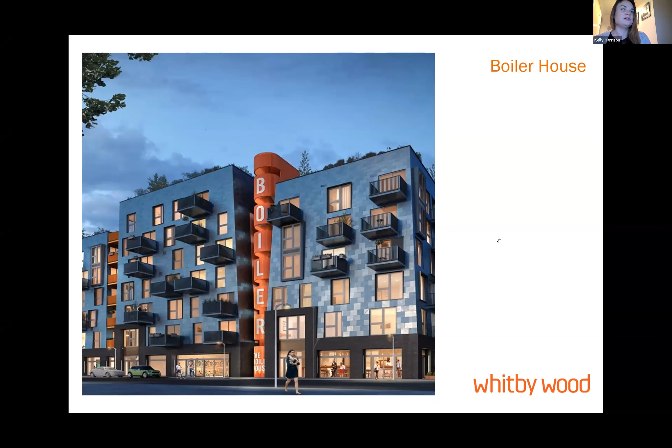I'll show you now a couple of projects where we've looked into a few of these studies. So this is the boiler house. It's been built now for a few years, but it's a project where the design at the start was for a concrete framed residential built multi-story residential building, and what we had a look at was changing that concrete to a CLT frame.

The concrete frame was originally on a series of piles in the ground as well, on piled foundations. This was a few years ago now when we were allowed to put timber in the facade of the building, so we'd have a slightly different model now with different exterior walls, but you can see it was a very lightweight construction, and I just wanted to show you a quick study we did.

So comparing to the original design, which had all of these piles under the concrete structure, we managed to make it light enough to allow it all to sit on a podium, which then sat on a raft slab. The original design had 967 meters cubed of concrete, and we managed to reduce that on a 600 millimeter raft slab to only 485 meters cubed.

I'm not going to quote costs here. I think that's probably for the QSs this evening, but this is the type of information we would give to the QS. So in addition to saving all that concrete, which has a huge carbon benefit as well, it also avoided a lot of risk in the contractor's price. So that's another thing to think about.

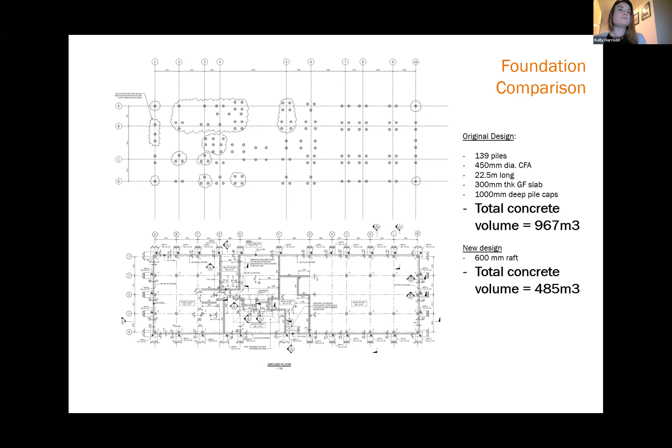That's been my experience. This is something else we did in the very early stages of a project, where we were looking at lots of different options. So not only were we comparing the carbon benefit of various construction techniques, but also the costs. We had a friendly QS help us - this was actually a project in Europe, so it's all in euros. We were able to look at what we thought the costs were for the structure, and also the CO2, and that could make a really strong argument to the client.

I think another thing you could add to this is the value, because sometimes it could also be a much more valuable asset to have a sustainable construction technique, especially with changing policies and targets that we all have to hit.

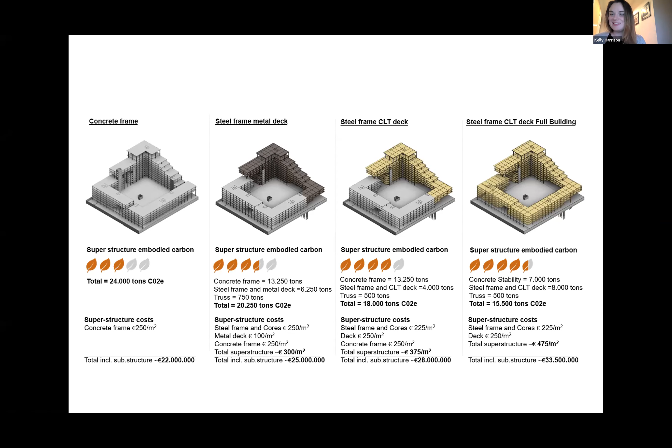Here I've just given you a few examples. This is what you should be thinking about when asking your structural engineers for options.

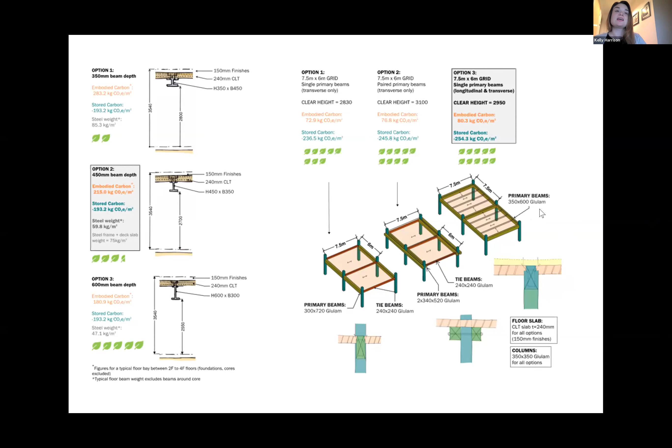That steel tonnage was then given to the QS to work out the price for the steel for the floor. We also looked at different options for timber floors, and again looked at the carbon of that. I think you should really be looking to your structural engineers to think about these different options and ways of doing things to get the price and the carbon down, because it often goes hand in hand.

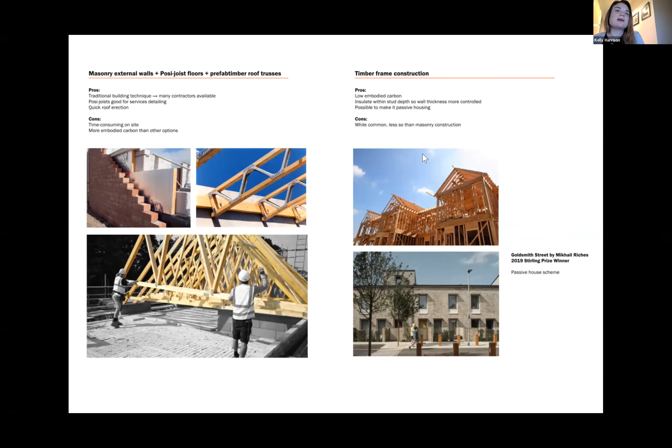Another one is timber frame construction. It's a bit less common than masonry, but also done quite a lot. It's really easy to insulate, and if we're thinking about passive house type construction, then it's something we should be considering. Low embodied carbon as well.

There are then other products on the market too, SIPs - structural insulated panels - where we have OSB either side with insulation. These are load bearing, so they can be our structure as well, but they're only done by certain manufacturers, so your pool of people who can build this type of thing is a lot smaller, reducing competition. It's really lightweight though, and can sit on very light foundations.

And then we have CLT, cross-laminated timber, which may produce a beautiful interior. It may also be very quick to erect, but it's quite thick - rather than having the insulation within the wall, as with timber studs, it will be in addition to the wall, so you get quite thick walls. It may be that on mass it's a very economical way of doing it, but for a singular house or one-off, it may be quite expensive.

So these are the sort of pros and cons and things that we think about as structural engineers and bring up to talk to our team - the architects and the QS - to come up with the best solution. So that's just a really quick intro from me, and I think we'll then go on to our speakers, if that's okay.

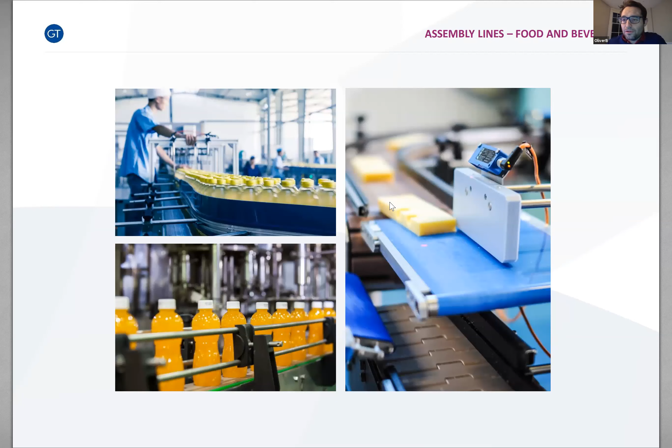In terms of food and beverages and certainly the automobile industry, and even caravans really, which is a step towards housing, these industries have been there for a hell of a long time. And yet, as Kelly touched on a little bit earlier, we're still physically using our hands brick by brick to build our houses, which is slow and perhaps ad hoc, and could be done in a better way.

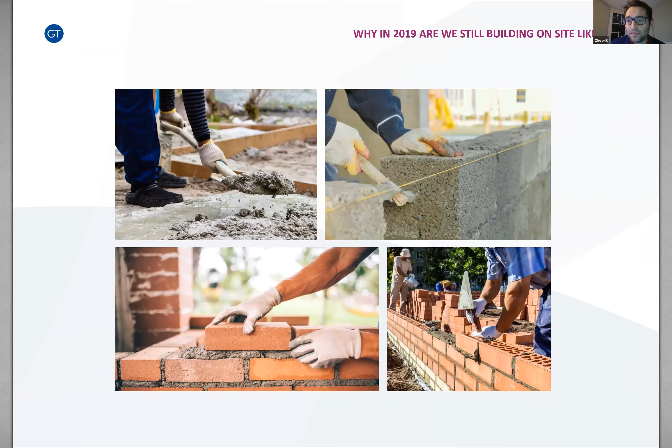So this slide is just to try and illustrate the idea that there's 30 to 50 subcontract packages in a typical residential project. But by adopting MMC, we can potentially take out some of those subcontract packages and actually use it in a way that we adopt it by going offsite.

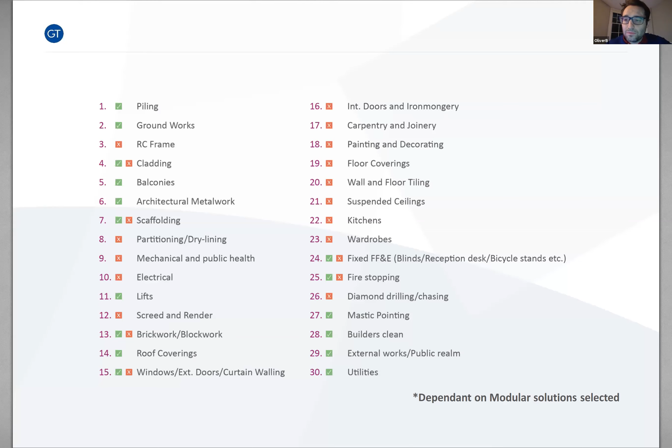And so that really means that we have to have a different approach to estimating. Ourselves and CAST, who are on the call as well, we've had to kind of rethink how we cost our buildings, and it's not been easy, and some are better at it than others in terms of organisations that have embraced it, and some haven't.

So I thought I'd start with a little bit of Latin. I don't know if there's any Latin scholars on the call, but basically the motto of the RICS is est modus in rebus, there is measure in all things, which I think is quite a positive way of looking at things. The way I read that is that there's nothing we shouldn't be able to cost really, and I think that's the approach we should take.

And a big part of that is collaboration. So as QSs, we're very used to costing reinforced concrete frames, which is essentially mass concrete, rebar. We get told the weights by Kelly and her guys and essentially price it on that basis, and then formwork. That's been around for a long time. We've got lots of benchmark data. It's very, very easy for us.

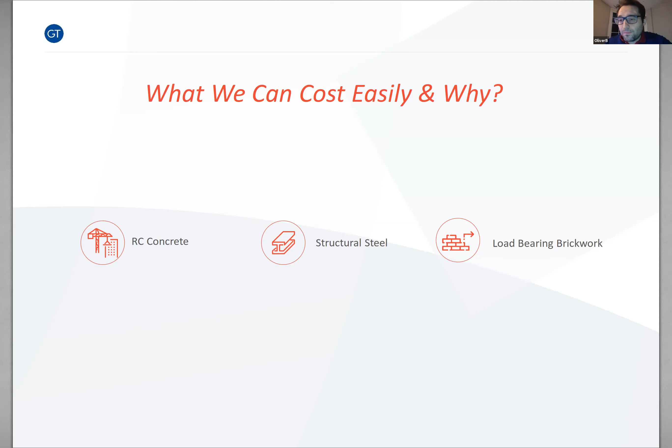Structural steel tends to be measured on a tonnage basis. Again, Kelly will tell us what kind of beams we should be using, and we will apply a rate for that. And load-bearing brickwork - again, it's been around for a hell of a long time, and we're very accustomed to costing it and have lots of benchmark data.

But we're in a relatively brave new world. I say that because obviously some of this stuff's been around a hell of a long time. And as Kelly's touched on, SIPs, structural insulated panels, the likes of Barratt Homes have been using this for many, many years. It's fast, it's lightweight, it's sustainable timber construction, glulam beams and columns. There's different species of wood.

Typically we might be talking about pine or spruce because they're perhaps the cheaper of the timber materials, but it may be that we could look at other materials as well, in terms of larch or beech and things like that. That's another question for you guys to get you thinking.

Cross-laminated timber, some of the examples Kelly showed earlier, laminated veneer lumber, and then hybrid. Don't just force a square into a circle or vice versa. Sometimes it's about working with materials to best fit the actual solution, the design and the site. This different approach means we have to look at different things in a different way.

We have to look at engaging with the supply chain earlier, which, because we live in quite a confrontational industry still, doesn't happen early enough. We need to look at different procurement strategies. We need to understand that if this stuff is coming off-site to on-site, what are the transport restrictions? As Kelly touched on earlier, lighter structure should mean lighter foundations. We need to work hand in glove with the engineers to try and do a comparison.

We need to look at economic design principles, because off-site construction has different design principles, which again are often driven by the fact that this is brought on the back of a truck to our sites, and there are restrictions in that. Benchmark data that's available is growing - CAST are doing loads of work on this, we're doing lots of work as well. And look at program savings, because it should be faster as well.

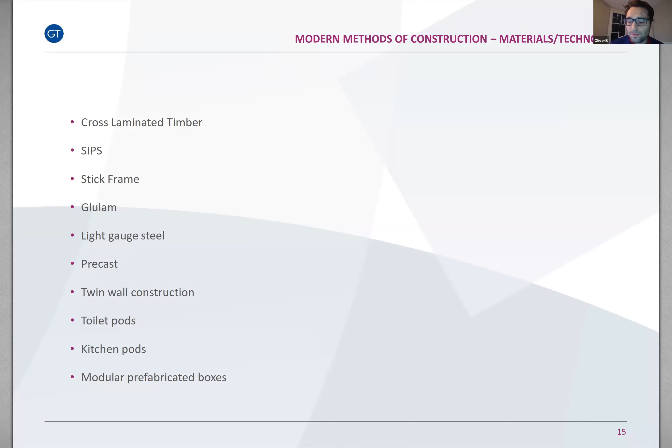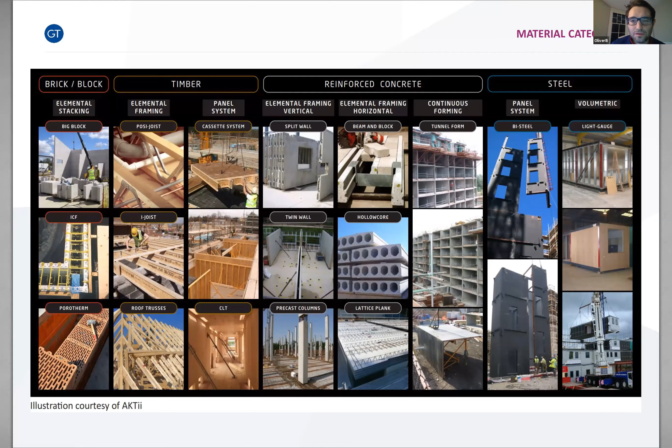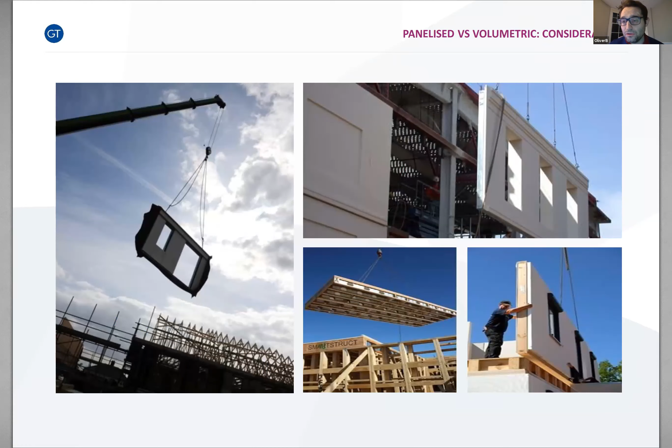Here's just some examples of that, and a really good slide by AKTii which shows all the different types and how they might all fit in - so I would pinch this because I think it categorizes it quite well. Also think about, in terms of what you're doing, is a panelized solution, essentially 2D construction, better for what you're trying to do, or are you going to adopt something that's perhaps more three-dimensional?

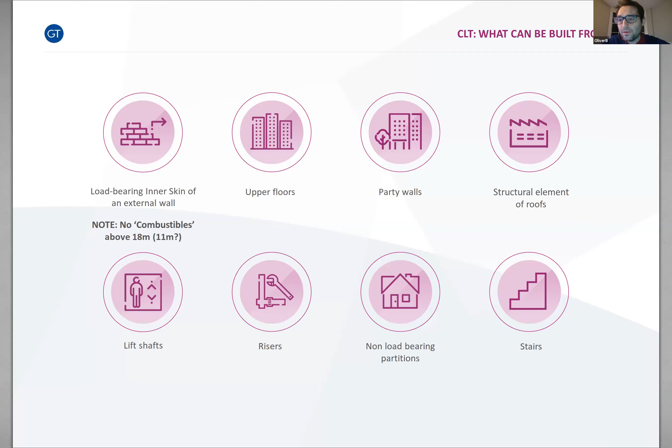Kelly touched on this earlier - be very careful about putting any timber in, because it is unfortunately categorized as combustible in your buildings, albeit at the moment that's only for buildings over 18 meters. It's probably going to 11 meters. So the heights you've been given, you could probably do it, but there's a danger you might expose your client to future changes in building regulations.

Just thinking about space layouts and good house building principles that sometimes get lost - stacking, spans, what makes your building more efficient. Let's look back to the automobile industry in terms of repetition and standardizing things, because savings will fall out of that.

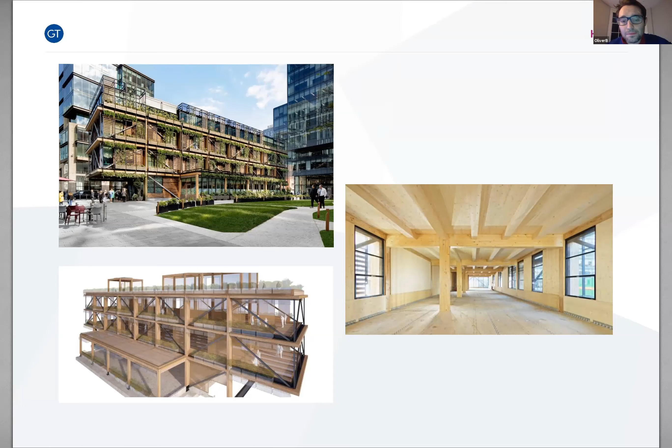Now some more extravagant examples. These aren't houses, but again, the use of glulams, CLTs, rib slabs - there's really a plethora of different technologies available today, so go out there and do your homework. This one's an expensive house, so I'm not expecting to see many of these, but precast concrete cores, LVL and CLT.

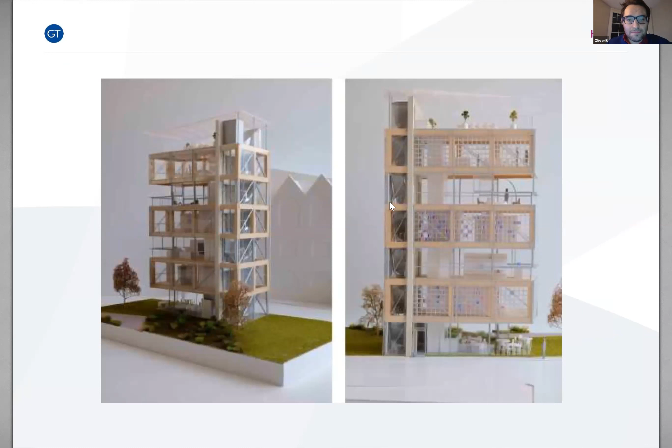In terms of supply chain and procurement, it'd be great to see your submissions thinking about how you're going to deliver it. Are you going to use a traditional main contractor on a D&B basis, or are you thinking more a construction management route - going into direct contract packages with subcontractors, suppliers, etc.? It'd be really good to see your thoughts on this.

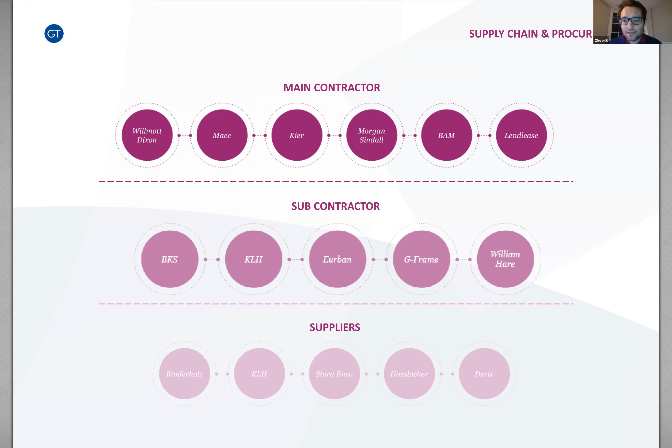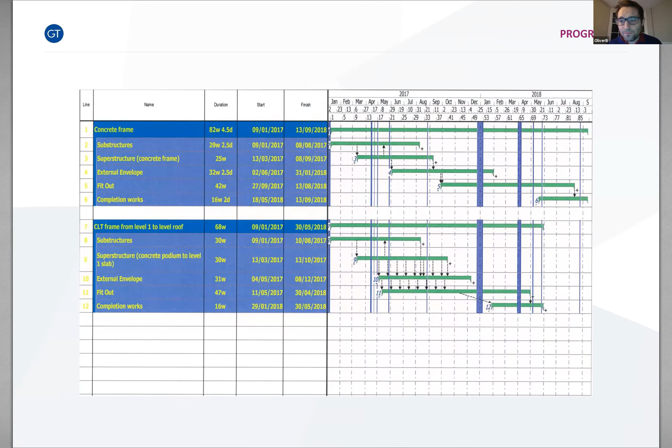These are all examples of people in the timber industry. Be great to get you thinking about program. As Kelly touched on as well, often as a QS we haven't got the program available, we haven't got the comparison. How are your houses, if they're more offsite, going to be built quicker? How are you going to deliver so the client's return on investment will be better? They might want to put some narrative to that and have a think.

Speed of install, program benefits, lighter structure, prefabrication, things like lack of patressing - this might be a narrative in terms of how you're going to do your submissions, but we really want to see you thinking it is sustainable.

We need to be thinking about embodied carbon. We need to also be thinking about life cycle costing in what you're doing and what you're choosing. Personally I've got a bit of a bugbear, as I know many have, that sequestered carbon doesn't seem to be recognised enough at the moment, but maybe you might want to write something on that.

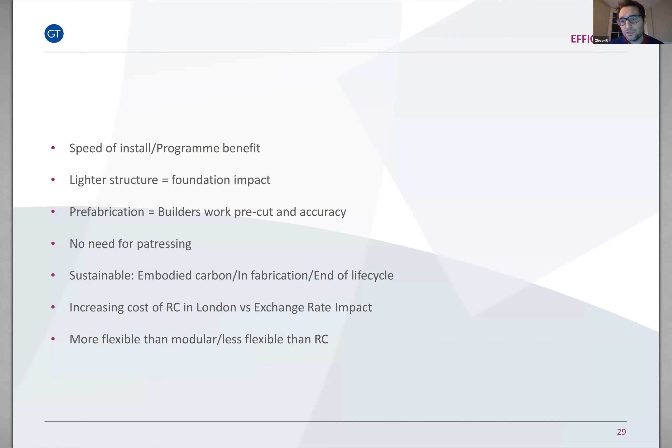I've touched on London there. I appreciate we're not working in London, but have a think about location as well and how what you're choosing will fit into that location in terms of cost, and what's most flexible as well.

Again, just themes - cost, procurement. Can the UK manufacture again? Quality homes - perhaps quality homes cost more initially, but there's lower life cycle costs, better quality of living for the people living in them. Job creation, in terms of using stuff that's built in factories that could run 24/7, that all sorts of people can use and be trained in. Good architecture, think about transportation and potentially capacity in the industry as well.

Going back to that original slide at the beginning - how do we fix affordability and availability? How do we meet critical demand? Well, offsite manufacture is a way, and timber has a massive role to play in that.

Time is money - this stuff should be installed and put together faster. Reduced risks because you're faster to site. You can manage the process in a factory environment which is quality controlled. It's potentially safer because it's done in that controlled atmosphere. Kickstart the UK economy post a Brexit era.

Technology advancement, BIM - again, it might be just a bit of narrative in your submission, but that might be something you want to touch on. Sustainable homes, getting to net zero. Let's face it, as a natural material, I don't think there's anything better out there than using timber products, so that should be a big part of it. Wellness for the end users as well.

I just thought I'd end finally on things that we might be thinking of as a collective of judges for the task you've got at hand. So what drives your procurement and tendering route? Think about - is it cost certainty to the client? Is it cost competition - do they want to compete, put lots of people against each other? Or would they prefer to negotiate and just get it right with somebody?

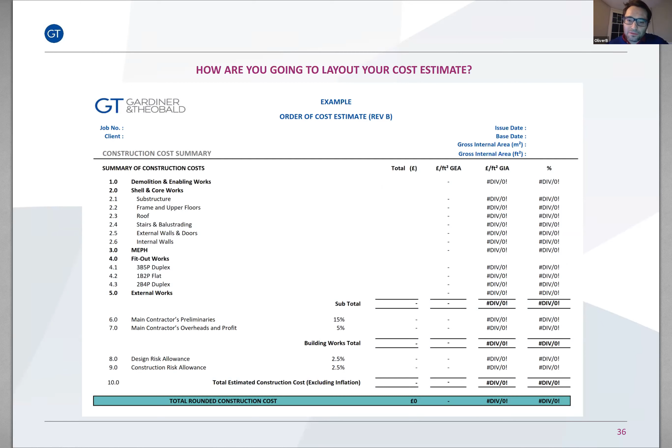Also just think about how you're going to lay out your cost plan. I'm sure the guys are going to talk about that more later on. But how are you going to put it all in a sheet and some backing sheets for your client to go through and understand what you've allowed for, and just some useful tips and references.

NRM, SPONS for costing if you can get hold of it, BCIS if you have access to the RICS facility. Market testing, ring people up and see if they'll give you a quote for stuff. I found people in the industry to be very giving with their time and advice. And don't forget your scale ruler, really.

And that was it for me. So thanks for listening.

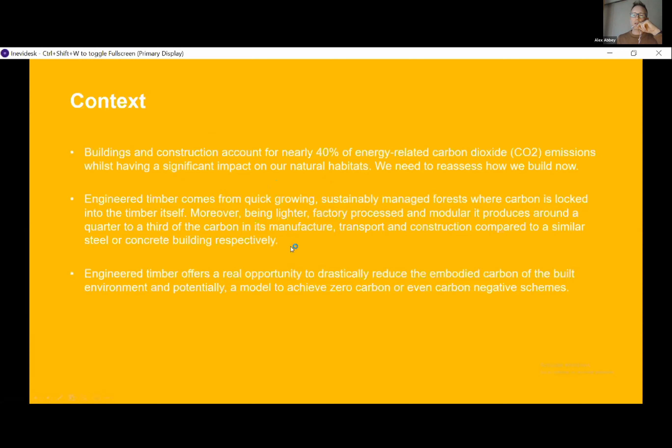So the first element is the context to say that buildings and construction account for nearly 40% of energy-related carbon dioxide emissions. But timber, hopefully, will be the solution to get us to net zero. And this is in the context of, as architects, we've signed up to Architects Declare. And the RIBA also has a 2030 climate challenge, which is about energy targets primarily, but also embodied carbon, and that's where timber particularly comes in.

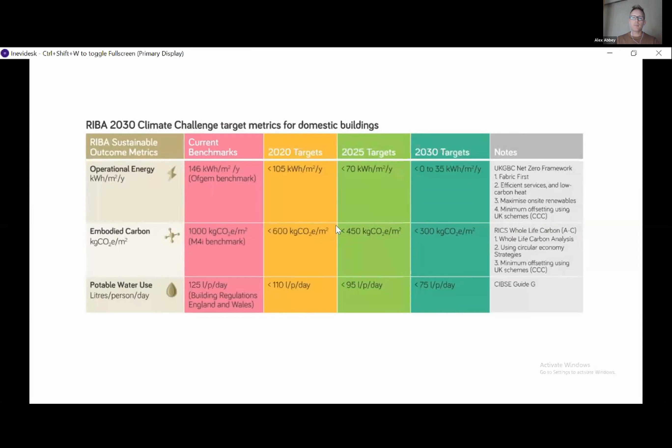And the LETI guide, which is the London Energy Transformation Initiative, has produced excellent guidance on how we can get to net zero. And I recommend you look at their documents. They're available online at LETI. And they've done a supplementary primer on embodied carbon there.

At the moment, TRADA and LETI are beginning a conversation about how we can get to an agreed benchmark for measuring carbon in timber, because the other industries, concrete and steel, are all fighting back and making it look like they're just as good as timber, but we don't believe it is.

So I am a partner at Cullinan Studio, an architect's practice based in London. And I also sit on the board of the advisory committee for TRADA. We are committed to re-establishing the natural world in our built environment, whether it's how we connect to nature, how we build for a circular economy, or produce healthy buildings for communities. And every project we work on now is seen within that context.

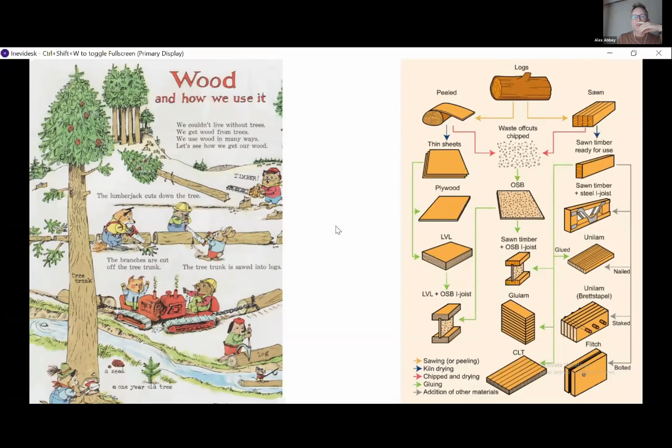Just up the road in Newcastle is what purports to be the largest timber structure in Europe, the Dunstan Staithes. This was also on your site, and it was used for dropping coal into the boats, with smaller ones there too. But I think the judges will inevitably be looking for something which picks up the industrial past of Sunderland.

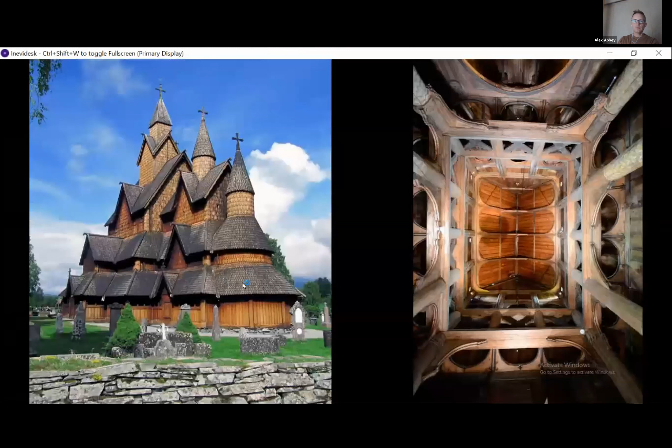There's excellent examples of timber structures there from history. The history of timber building is long - timber, if properly detailed, can last upwards of 1,000 years. These are the stave churches in Scandinavia, Norway, load-bearing timber, very simple but beautiful.

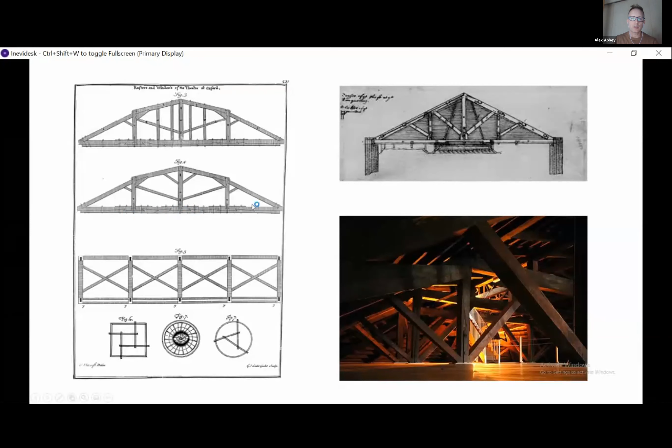People like Wren and Inigo Jones took cues from the Renaissance architects and developed improved ways of spanning greater distances. For instance, the bottom right is the Sheldonian Theatre in Oxford, looking at how you can take simple pieces of timber and scarf them together to get better spans and improve the structure.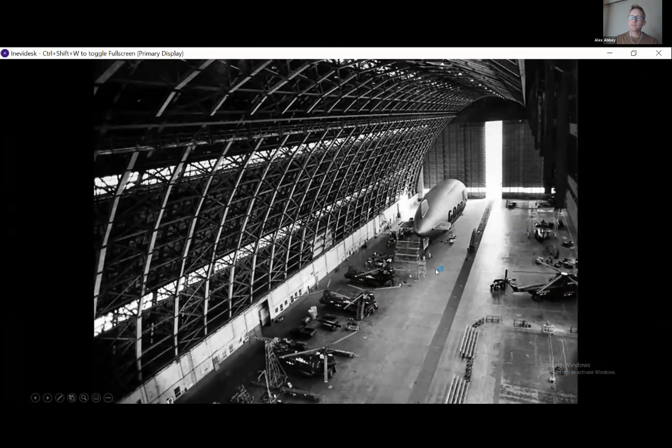Then you get to the big spans like these airship hangars here. I'm going to try to also give you examples of projects we've worked on in our practice, which are good lessons or examples of similar systems.

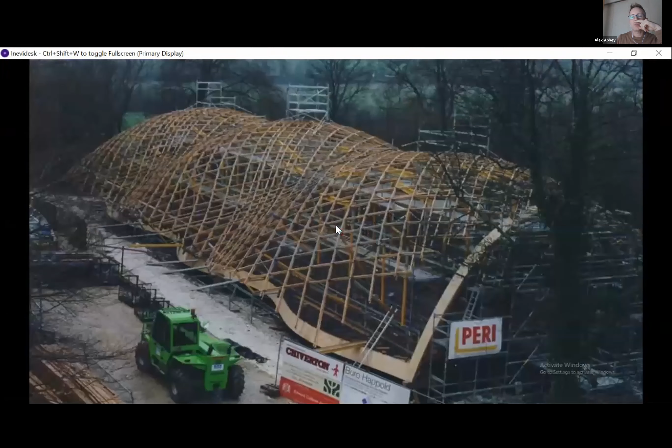This is the grid shell we built at the Weald and Downland Museum, using very small pieces of oak, finger-jointed together like spaghetti, over 50 feet long, then basket-weaved together, and we dropped the scaffold to create the building. I'm not saying this is what you should do for your house, but it shows you the possibilities of timber.

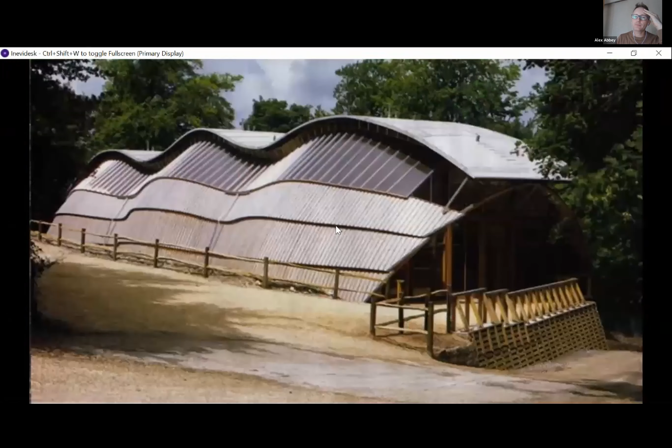And a very successful free-span space with minimal use of timber.

Cost and value - I won't dwell on this too much because Ollie has already talked about this, and Danny and Rob will come on to it later - but this was in the book, a study comparing concrete and CLT. Even though the costs at the end were broadly similar, you get a much faster build, which has savings against that which aren't shown in this figure.

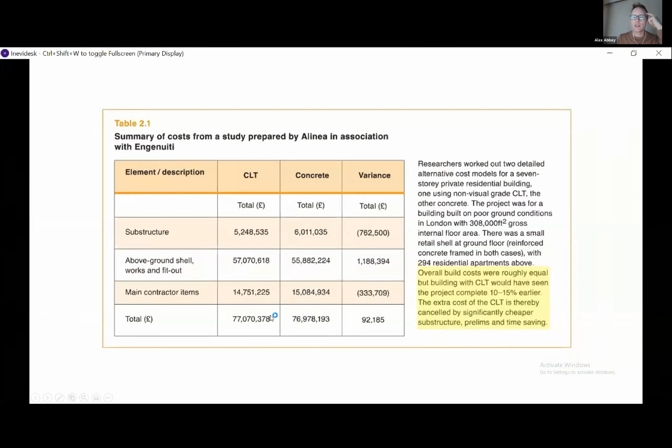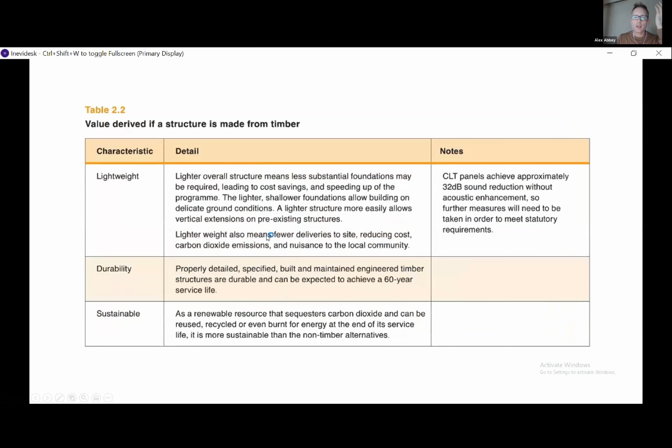The benefits of timber, I think we've all seen: it's lightweight, durable, if properly detailed, sustainable. The value derived from it is that you get accuracy. It can be load bearing. It's very easy to fix to, rather than plasterboard, which can be a nightmare with patching. It can allow minimal thicknesses against other structural systems, which over several stories can get you more floors for the same height of building.

Energy saving, self-finishing if you expose it - obviously visual grade timber is more expensive, but it has other benefits I'll come on to. And off-site manufacture, one of the big issues, absolutely leads to much safer sites, which is often overlooked, in that if you're producing things in factory conditions, they are safe, they're in the dry, well lit, with systems set up for production lines, so it dramatically reduces the potential for injuries on site.

There are issues as well. One of the cons at the moment is fire, insurance and water, but they can be overcome, and TRADA is working hard on this with the Structural Timber Association and the industry to come up with a suitable response to the sort of knee-jerk reaction of 'we can't have timber in buildings because it burns,' which is unfortunate.

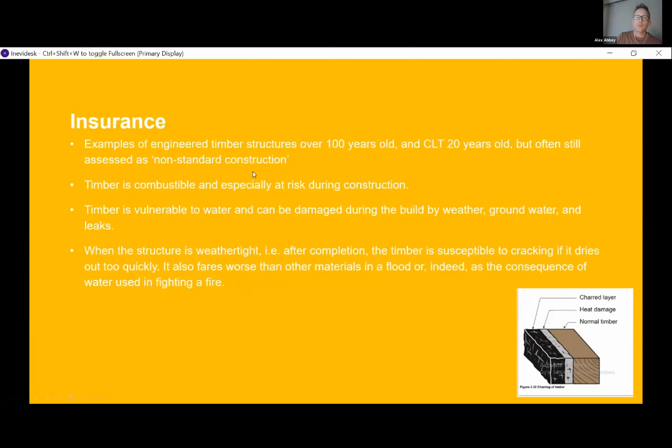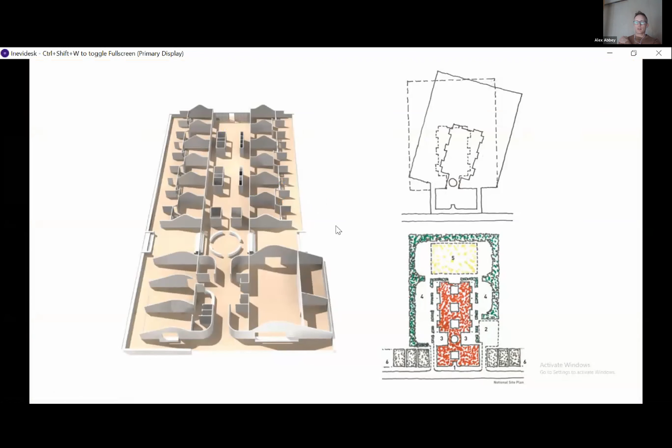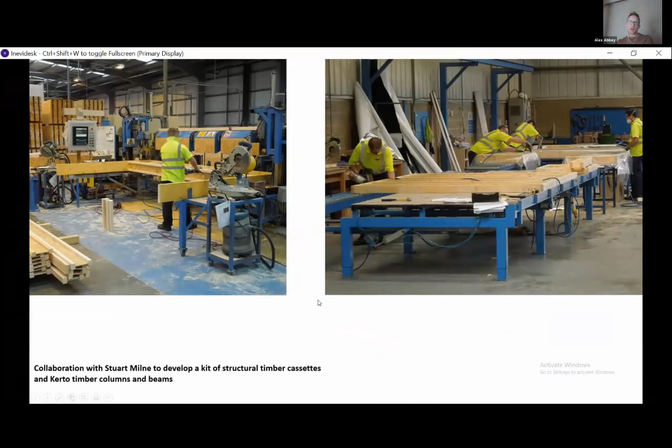Here's an example of one of our projects, a SIPS panel school designed as a kit to go anywhere in the country, but ideally to fit into a street facade. It was a repeating module of classrooms and toilets. We worked with a SIPS manufacturer, Stuart Milne, to develop this prior to having any site, and we tested it on a site in Swindon. It went up in less than 5 weeks, and the whole building was watertight in 7 - a huge improvement over traditional methods.

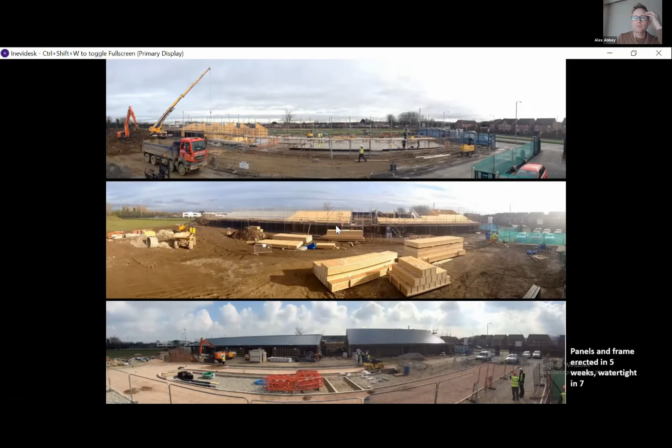Although that was mainly SIPS, this is the recent Stirling Prize winner in Norwich by Mikhail Riches, which, although brick, is a timber frame project - a passive house, and an example of how you can produce really the highest quality housing in timber.

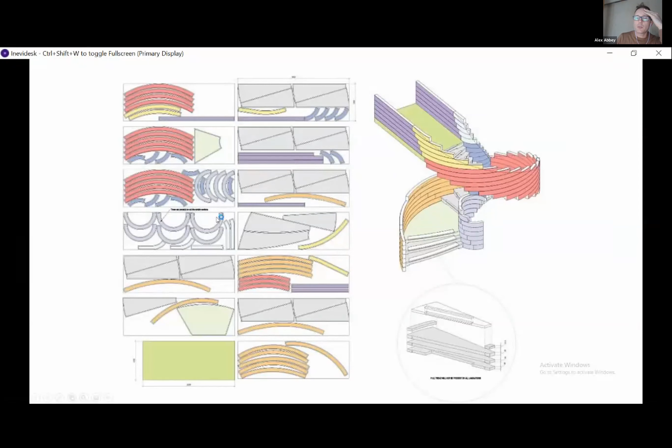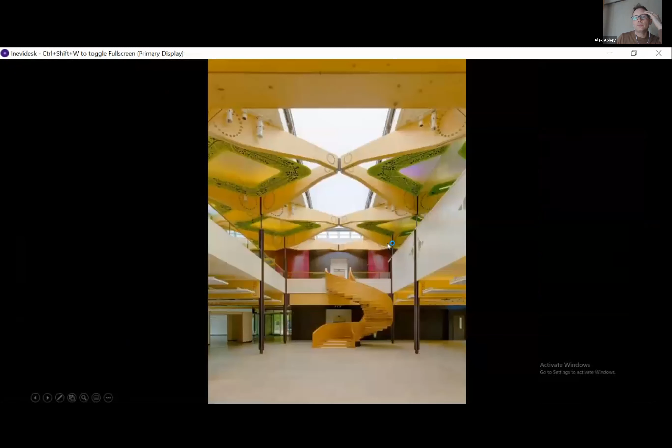Here's a building which shows that if you understand the material, you can make it work for you. This is what we did at the Botanic Gardens in Edinburgh, where we understood how to use the LVL, designing a staircase which could be cut from standard sheets, again modular, to produce a feature stair out of LVL which was stacked and carved.

So structural timber used as a piece of furniture in a sense. This is a hybrid building as well, with very thin steel columns to get that sense of lightness, and then heavyweight timber beams floating over the top.

There's increasing knowledge within the industry of how to use timber, although what we found is it's more prevalent among certain contractors - they like to use it once they have, but some are afraid to, and you have to convince them.

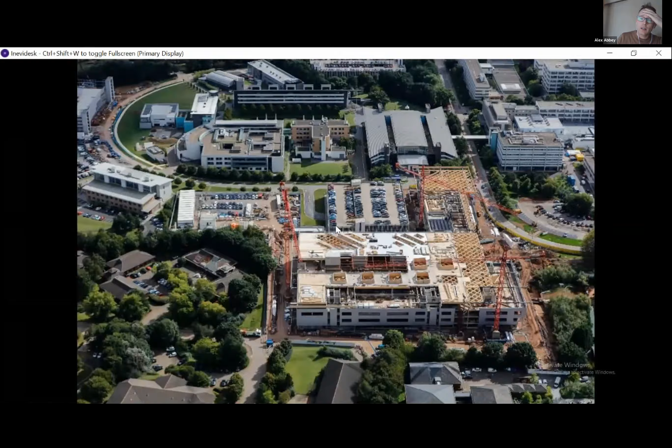This is a building we did at the University of Warwick, the largest timber roof in Europe at the time. That was working with Arup, for Jaguar Land Rover, who are car manufacturers, but they wanted this unifying timber roof for the benefit of the users in the building and the quality that gave them.

Supply - you need to think about supply. You're right on the docks at Sunderland, so could you create a nice set of drawings about how you could bring things on ships and get them to site? A lot of engineered timber tends to come from Europe - CLT particularly, and LVL. Or could you helicopter it in?

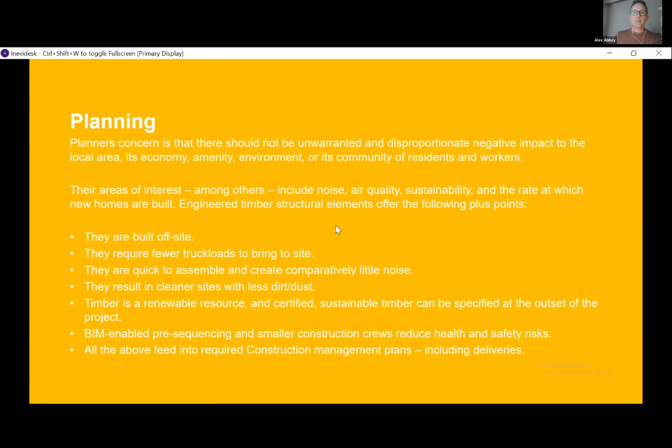Durability you have to think about, which I touched on at the beginning with those 1,000-year-old churches. This is a walkway we've been doing - it has to sit in a forest, and once it's up, it's up, so getting in there to maintain it is much harder, meaning it has to be very durable. You have these little timber pods for learning areas, made of Accoya, which is a chemically treated timber so it can last outside.

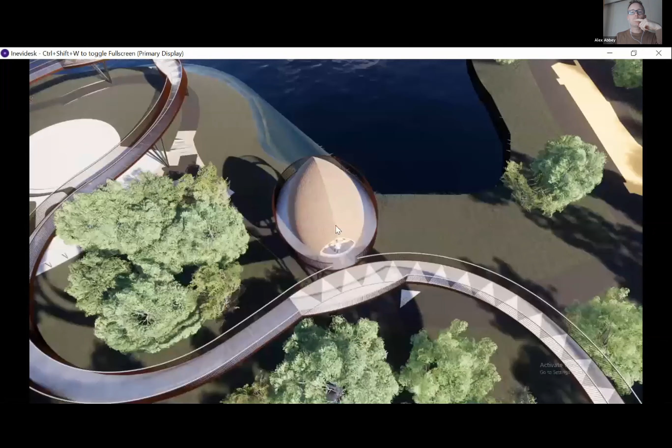So you have to think about what you're going to clad your buildings in. If you do use timber, there are other methods like charring it or coating it to consider. That's one of the learning pods.

So yes, think about how the home is - where you get light in, how can you make it feel like a home.

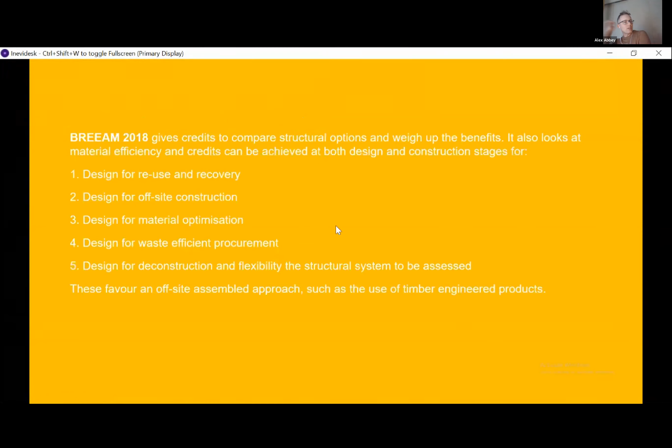We need to think about doing that. We need to be doing that now for hitting net zero.

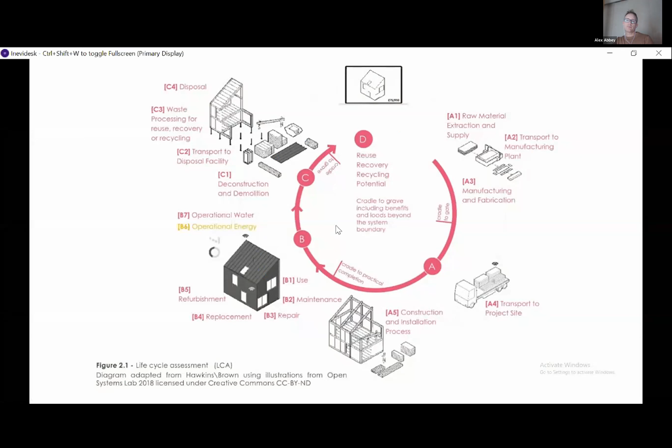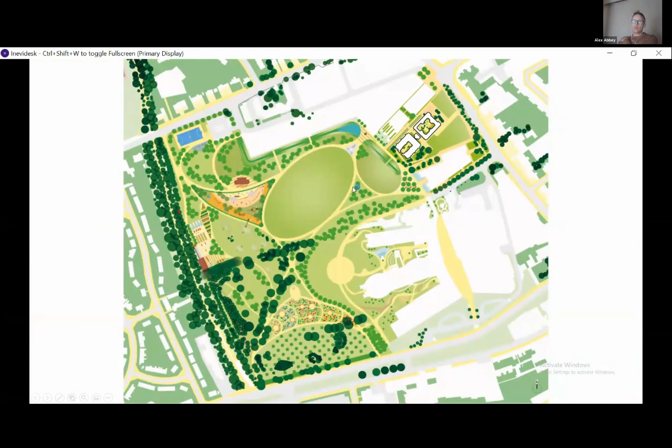That's why we've been working on this project, a park and health buildings for the NHS in Liverpool, Alder Hey Children's Hospital. We selected timber for it to encourage homeliness for the children with mental health issues who are using these buildings, and to give them, even though it's an NHS building, a feeling of less of an institution, and encourage health outcomes and quicker recovery times, all around a garden with views and light, and places to sit.

So that's me. Thank you.

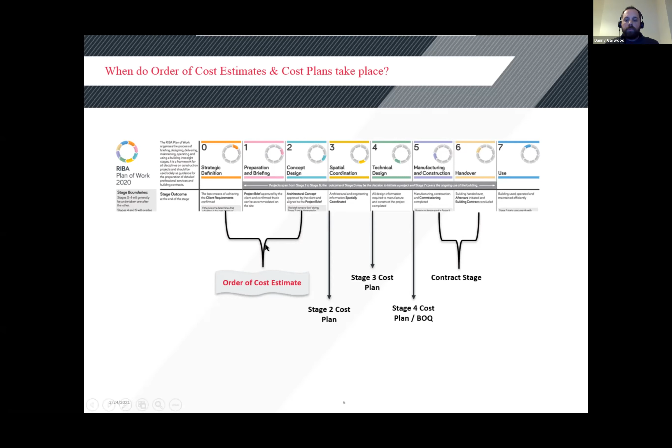So this is where it gets really exciting.

The RICS guidance of NRM 1, 2 and 3 really gives the industry a consistent approach to how we structure cost plans and cost estimates, and sets out rules for how we should approach each individual element. NRM 1 talks about the structure and the rules, and NRM 2 goes into the finer detail of how you would measure a timber building, for instance, to the nth degree, and that typically doesn't take place until the later design stages. I must admit, NRM 3 I've never opened in my life, and that's more looking at how we cost and estimate maintenance work, so hopefully none of you will ever have to do that, because I imagine it's not very exciting.

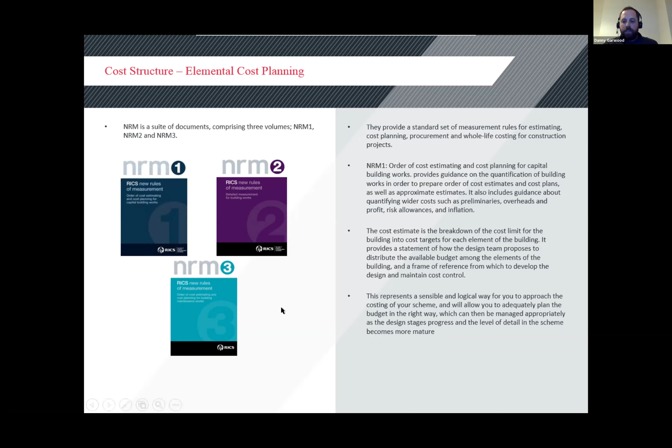Okay, so what we're showing here is the typical structure of a cost plan, and I think Ollie showed it in his slide earlier. I think this is probably quite an important slide to review and understand.

This is the breakdown we'd typically see a cost estimate broken down into: you have your group elements, which are 1 to 8, the building works, and this is any cost associated with the direct cost of putting the building up. Then we've got groups 9 to 14, which we call the indirect or on-costs, which are typically your main contractor's preliminaries - the management required to build your house or any project, alongside all the plant things like tower cranes, scaffolding, your site setup and welfare, all those things that sit in your preliminaries.

And then the 10 to 14 are the costs of the overheads and profits - obviously we need to be paid at some point - so you have your project and design fees, architects fees, other development and project costs. Then typically you'd have a risk allowance and also an inflation allowance. Some projects we work on can go on for 3 years, or we could speak to a client 2 years ago and still not have got it through planning. So we do have to take inflation into consideration, because depending on the size of the project, it can be a long time before that initial first cost estimate until you're actually putting that first spade in the ground.

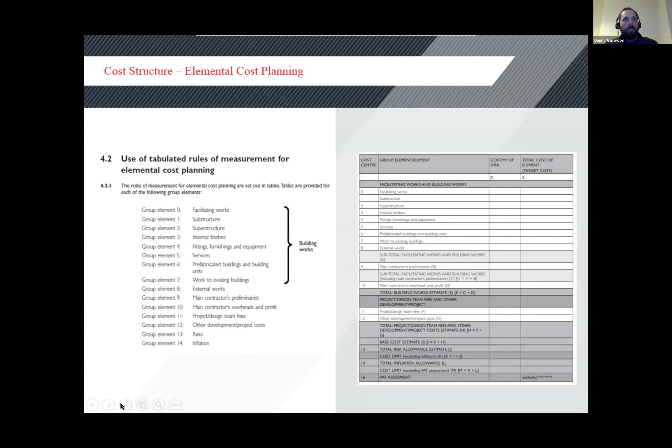Your group element is your 9 or your 14 groups here, and within those group elements you'll have an element - so that would be your frame and upper floors, your substructure, going down to your roof, stairs. So it's broken down, and there's a clear defined structure in place that the NRM sets out, which most cost consultants will follow.

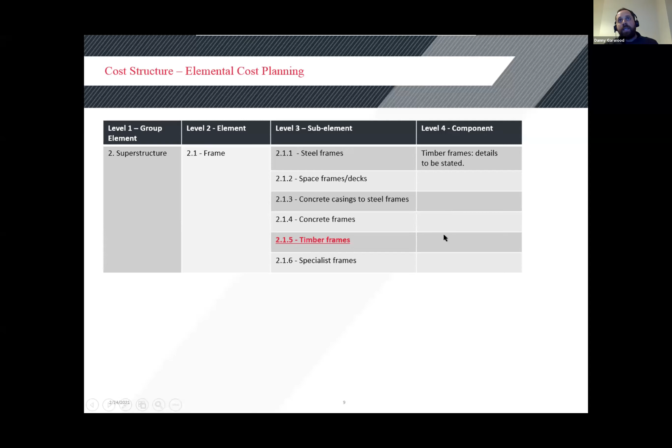It then breaks it down into your sub-elements. So your superstructure will need a frame - that frame is your element, and then that frame could be a variety of sub-elements, or just one sub-element. I've highlighted timber frames here because obviously there's a lot of timber talk. Then you go into your level 4 component, and further detail exactly each component of that timber frame.

So Rob, do you want to talk about data sources? Yeah, I think we wanted to cover a little bit. Obviously we're at an advantage—we do this stuff day in, day out. We have rafts of empirical data at our disposal where we understand the cost of things. But for you guys, it must be a little bit more challenging.

We touched on it earlier in one of the earlier presentations. There's a number of different areas where you can source data—BCIS being one, pricing books like SPON's being another. As cost consultants, one of the things we have to do very often is be very close to the market, and the market's changing all the time. Right now, the volatility out there for a number of obvious reasons means that if we haven't got our finger on the pulse and an understanding of what macroeconomics is doing, such that it affects material and labour pricing, and how that translates into subcontract and main contract prices, then we're going to be giving our clients pretty duff advice.

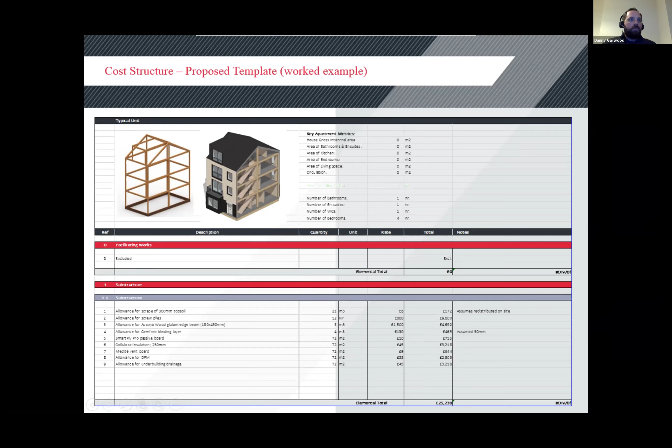So Rob, you're going to talk about cost drivers here. Yeah, what we don't want to do is get you all disappearing down rabbit holes. What we find, and how we advise our clients, particularly at early stages, is that 90% or so of cost in a residential asset can actually be boiled down to very, very few packages of work. Focusing on 6 to 7 packages or so means that chances are you're going to set the framework in a much more accurate fashion early, rather than getting too bogged down at too early a stage on particular levels of carpet finish or particular costs of paint finishes in your scheme.

So what we wanted to articulate here is that when you're thinking about your cost estimating as part of your design solution, try and focus on the big ticket items, because that will deliver a more logical and accurate outturn than perhaps getting too bogged down in some of the detail early on.

Things like the substructure and frame, the envelope, the servicing, and some of the fixtures and fittings like kitchens and bathrooms are some of the major building costs. Management and logistics is something that perhaps sometimes gets overlooked, but actually can contribute hugely to the overall cost of a scheme. If you're trying to get really efficient, the more deliverable in terms of speed and efficiency on site, the much more cost effective your scheme is going to be.

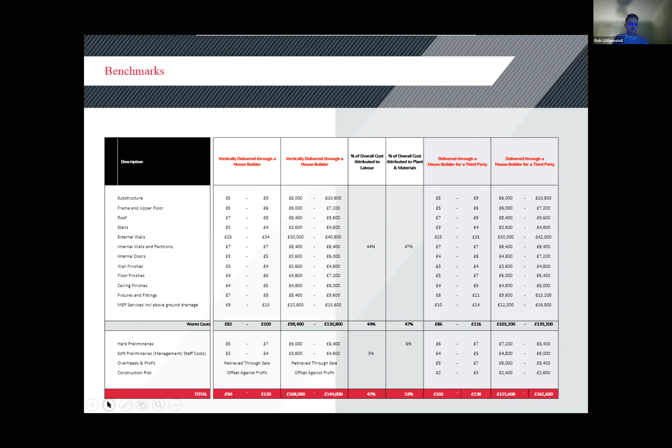Just a flash here of some very typical benchmarks for house building costs. They can vary quite dramatically depending on how they're actually delivered, whether via a house builder directly or via a third-party main contractor, so you can end up with very different outturns. At the lower end of the range, house builders can deliver these things for somewhere between £90 and £120 a foot, depending on specification, size and scale. Whereas third-party main contractors are delivering slightly differently because of the way it's set up, somewhere around £100 to £140.

A quick touch on value, really important, because as residential QSs we need to have an understanding of value, because the success of the scheme will depend on the relationship between the two. In simplistic terms, if you don't spend enough on your project in terms of specification, you end up limiting your ability to sell, reducing your absorption rates, i.e. the rate at which you can sell or rent assets, and decreasing the success of the scheme. You often get pressure from planning and the design critique aspiring to much greater quality levels. At the other end of the scale, if you spend too much you breach what we call ceiling values and effectively devalue your scheme. So you need to make sure there is an optimized relationship between development value and build cost, such that there is overall success in what you're trying to do.

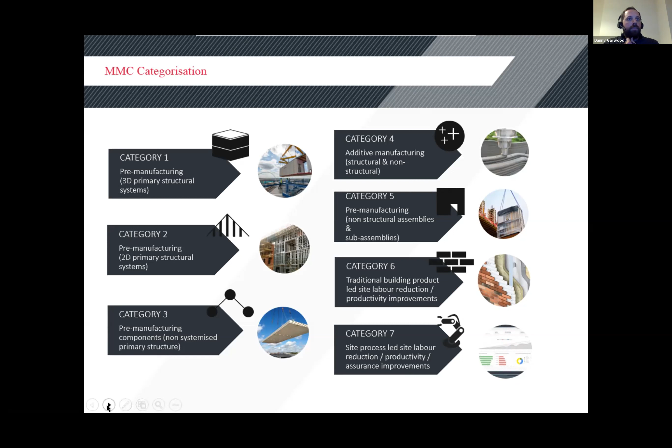Kelly, just reflecting on the question at the beginning of the session on why isn't everyone doing it. There's a variety of reasons, but one we find in our experience is familiarity. A lot of clients are so wedded to particular site and design processes they've done for many years that the thought of doing something different in a factory feels alien. They're almost scared of adopting and delivering it on site.

One reason the MHCLG went away and came up with a categorization of different modern methods was because there was such a plethora of language being used to describe what is ultimately the same thing. People became very confused and didn't understand what they were trying to do. So in a world already familiar with what they want to do, plus confusing language, the barriers became greater and greater.

So what the categorization is there to do is increase people's familiarization and understanding of it, so people don't just jump to volumetric boxes when we talk about MMC. There are actually a lot of different technologies out there that can add to the pre-manufactured value of various schemes and deliver benefits in many different forms. There's cost and procurement nuancing that goes with that we don't have time to cover today.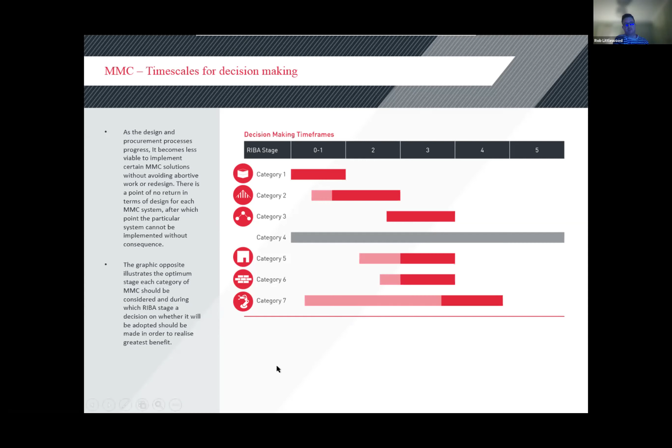And when you look at it, it's quite a daunting document. But if you start to understand and look more at the rules for each element, it's quite quick to get a grasp of it.

Obviously we'll issue our cost estimate template to help as a guide. It's purely there for a guide, and if you want to go off and carry out your own cost estimate, we're more than happy with that.

We touched on SPONS, BCIS, and we've all spoken about speaking to the market. There are some nice people out there, so they will respond to your requests. I think what we're probably looking for is you to articulate who you've spoken to and where you're getting your costing data from.

And also I think we're going to set up a drop-in surgery. I don't know if it'll be fortnightly or weekly through the process, but myself and Rob will be there to answer any questions you have.

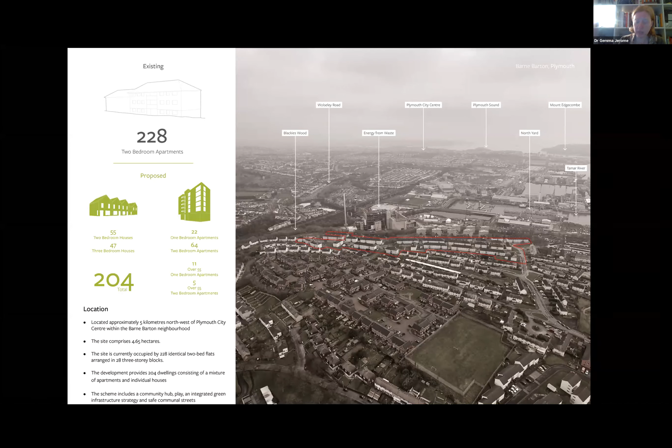Just a little bit of context, it's an existing development that's being redeveloped, and the nature of the scheme is that there's a lot of challenges around the site in terms of access to nature, in terms of the quality of the existing built features. So you can kind of pour over these slides later. I'm just going to whistle through them at the moment, but you can see here, this is a photo from the site, the existing residential units.

They're badly in need of regeneration. People are living in houses that are damp. It's not fit for purpose for a kind of happy habitation anymore. And the site also has some other kind of constraints around the fact it's on a slope.

There's a lot of factors around wind, and the conditions are challenging.

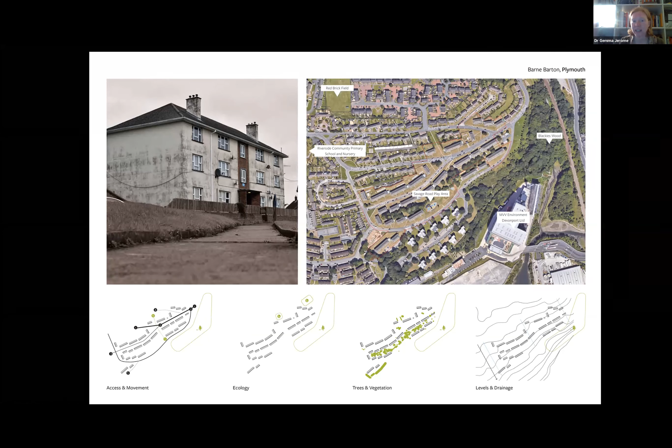At the detail scale, we've got concerns from the community in terms of feeling like they're losing their homes, and it's about recognizing the community engagement role of the design team. How do you bring people with you on a journey? Even though as professionals we might look at this and say that green infrastructure isn't multifunctional or high quality, let's just get rid of it, the fact is people have lived here, some for generations. That's the situation they're living in. How do you tell the story so you're actually bringing people along with you on that journey? That's a really key part of the design team's work.

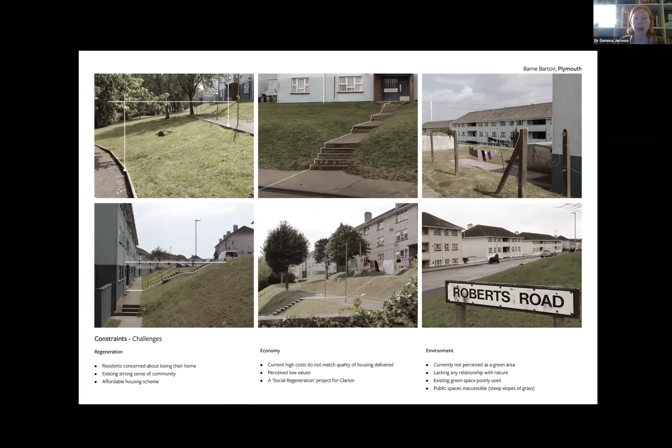Are these spaces being used well? At the moment, they're not, but people are still attached to that sense of space. So you need to factor all of this in when designing, whether for an existing community or a new community. There's a clear constraint at the moment about lack of nature - a lot of the green space is just managed amenity grassland. That means there's a lot of opportunities.

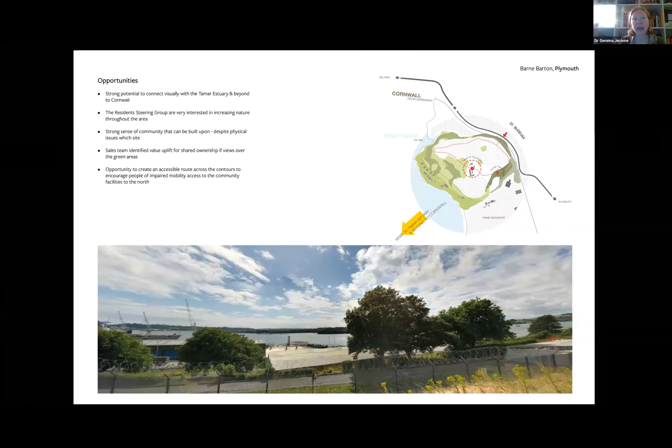There's a really big potential here to link this site to the wider nature recovery network. What do I mean by that? We have the Tamar Estuary just down the road, and there are fantastic vistas and opportunities for linking the landscape scale with the site scale. So the approach this design team took, building in the thinking around the Building with Nature standards, is to make a more connected scheme using green infrastructure as key linkages between the buildings.

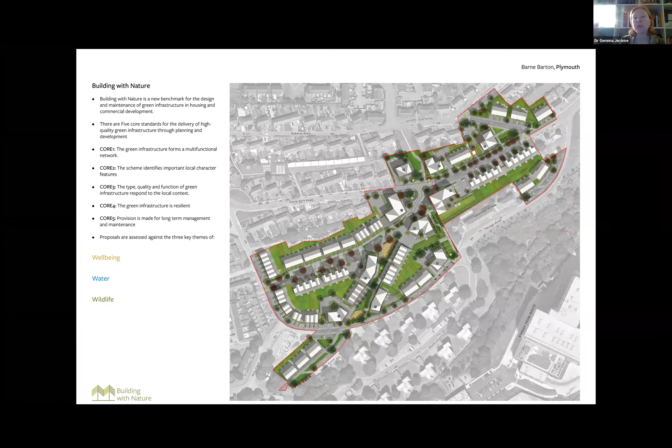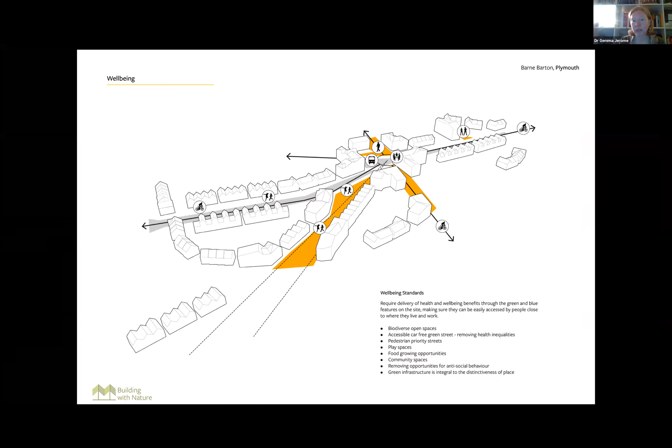With Building with Nature, there was a chance to put more emphasis on green infrastructure in and around where people live, but make those spaces really high quality, attractive, and multifunctional, so people can see them as both private and public space. There are opportunities for social gathering, for active lifestyles, thinking about how people move across the site - key issues around permeability, both for people and for wildlife. So factoring all of this in and layering it up as you bring forward your design decisions.

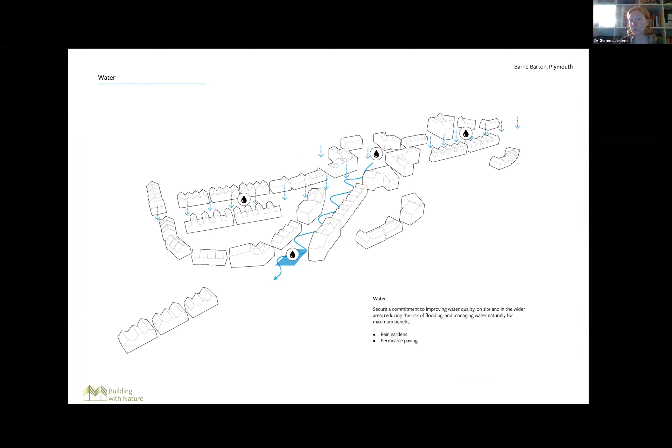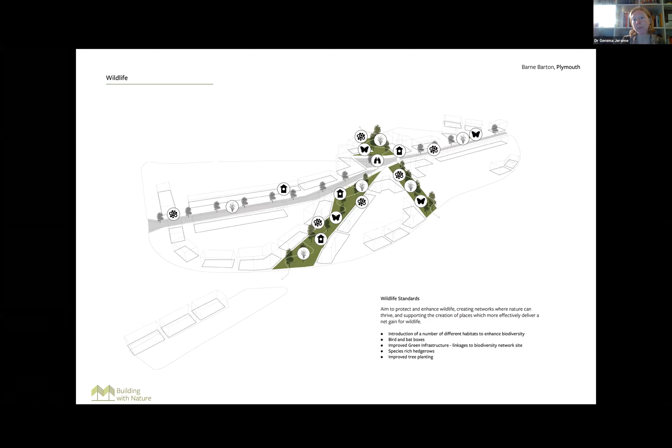With water, there's an opportunity to take as much advantage as you can from the surface area you've got, to slow down the passage of water on a sloping site, and hold the water in the landscape through features like rain gardens. From a wildlife point of view, are you maximizing the opportunity for new biodiversity features? Also thinking about the mitigation hierarchy - retaining features that are on site where possible and using them as your palette for introducing new features.

There's a nice snapshot of the scheme that was permitted in planning, and I think you'll agree that in principle this is looking to be a much higher quality scheme than we currently have.

To give you a flavour of what that means in terms of accreditation - as this site is still at planning stage, it has a design accreditation. The design accreditation for Building with Nature recognizes that a scheme is on track to delivering high quality green infrastructure. However, at full planning stage, we push our applicants through to full accreditation. There are two possible outcomes, good and excellent, and that's where we start to see the detail - what's your species selection, how is your green infrastructure being delivered in terms of orientation and connectivity between the features?

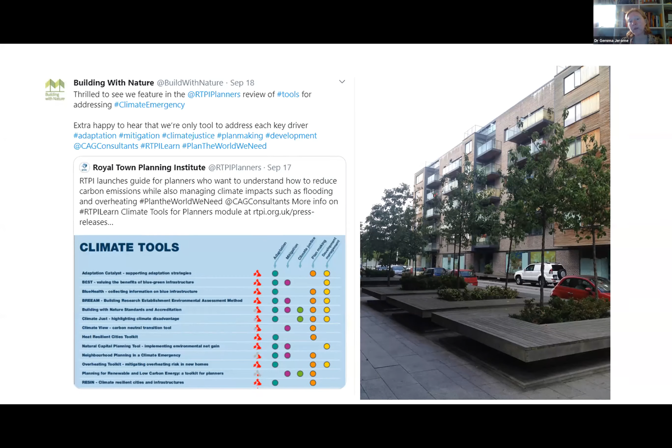Just to end on a couple of key messages, that yes, we are facing a climate emergency, and yes, we need as much help as possible in terms of climate tools. Some great feedback from the Royal Town Planning Institute about Building with Nature, that currently it's the only tool out there which really does look at every aspect of the climate emergency - adaptation, mitigation, climate justice, plan making and development management. We have thought about all of those different stages and aspects. So really great feedback there.

And this is a bit of a sneak peek, guys, we're in the process of redrafting the standards, simplifying. We're now at the stage of having used the standards for 3 years. We're ready for a reboot. And this is some of the draft wording that I wanted to add in to reflect back some of the messaging you've been getting from the other speakers.

We're really clear and conscious that where industry is going is zero carbon, and low carbon approaches to design, construction, and long-term maintenance, and we're reflecting that back in the standards. So making sure the messages are on point and are the same from both the policy side and from what's practical to expect from industry.

And then also environmental impacts. We are aware of how much green infrastructure can impact positively on the quality of air, soil and water, and how sometimes, especially things like soil, that's forgotten. So it's not just above the ground, it's actually thinking about everything that's below ground and how important that is in terms of us being able to adapt to a future which is more uncertain.

And then thinking about the quality of light, the quality of noise, and how green infrastructure can help to maximise the quality of living in a space, using green infrastructure features to help with that.

And to finish, if I've got time, Kelly, I am going to attempt to just pop across to YouTube and show a video. This might not work, so apologies if it doesn't. Can you see and can you hear that? We can hear, but we can't see. Oh no, I don't know. Okay, tell you what, guys, I'll pop the YouTube video link in the chat, and you can watch it afterwards, rather than take up time now.

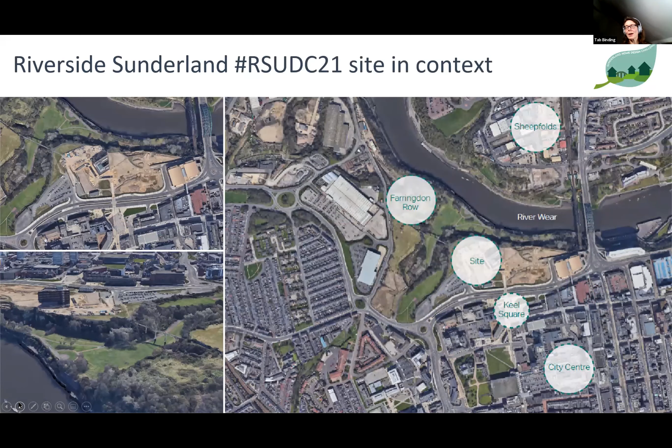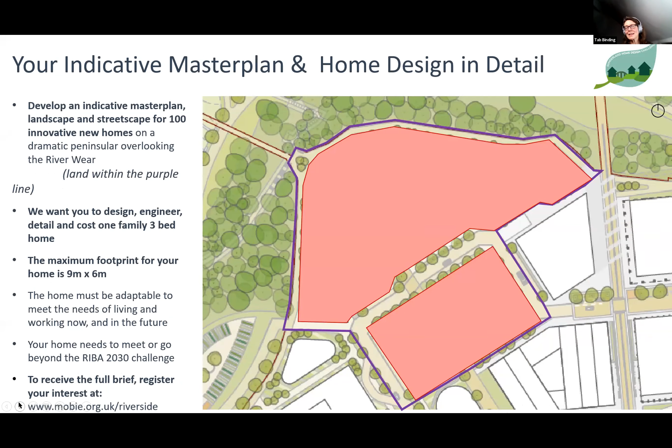And to take you back, this is your site in Sunderland to help us develop - this is your area, and this is a different view of your site, an aerial view, and you can see all the contours of the land. They're looking for a carbon neutral community, 100 homes on this site, but in detail, the 3-bedroom family home.